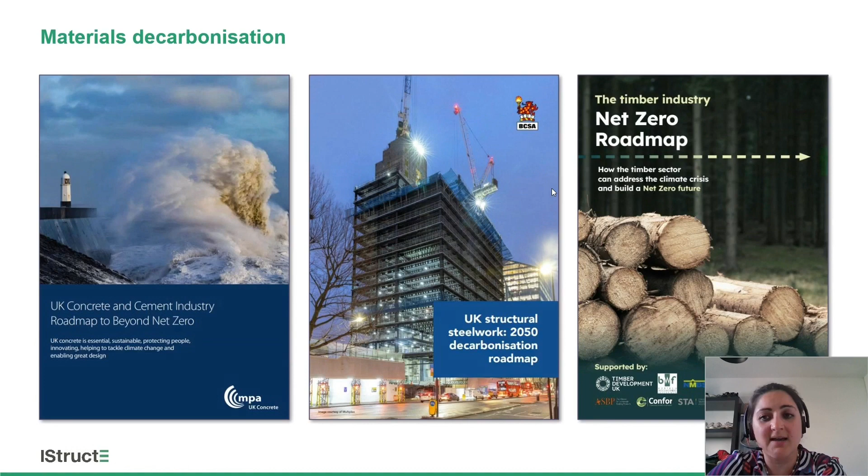The supply chain expectations: we're going to look at three of the key structural materials that we use - concrete and cement with the roadmap produced by the MPA, the structural steelwork decarbonisation roadmap produced by the BCSA, and also the net zero roadmap produced by TDUK, which was released I think in January this year.

Starting with concrete and exactly what's happening there. We've only included the emissions associated with production of concrete here, so that's why, if you're familiar with the roadmap, you might think a couple of them are missing. We've got indirect emissions from decarbonised electricity.

This is really focusing on the fact that we are going to be decarbonising our grids. Also with transportation, we're not going to be producing or selling new combustion engine cars and vans from 2030, and 2040 for diesel trucks. So there are savings indicated there.

There's also a focus on low carbon cements and concretes, which I think many of you might be more aware of because of all the industry press around these very interesting developments in that area. Then also in green we've got fuel switching.

So this is moving away from fossil fuels, but also focusing on things like hydrogen production there. And then we also have a very large percentage dedicated to carbon capture, usage and storage, so CCUS, which I know many of you on the call may be aware of.

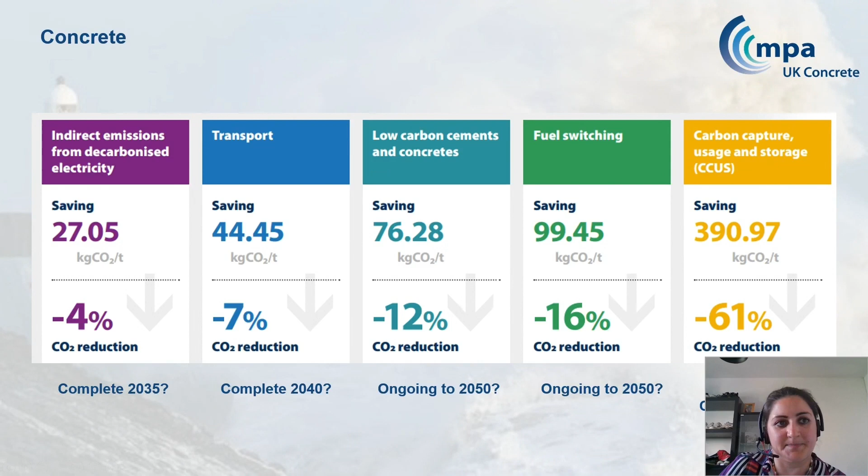Moving on to steel. Again, savings that are within the BCSA document associated with design efficiencies etc. have been removed - we're just keeping it to emissions associated with production. So therefore we should renormalize these CO2 reduction numbers associated with that.

The first and largest one is emissions reductions based on direct steel making. So this is everything from focusing on hydrogen production to changing fuel sources, those kinds of things. And again, with hydrogen, as with carbon capture and storage, it really relies on the fact that we're going to have to invest heavily and upscale hydrogen if we're going to be confident that it will provide us with the CO2 reductions that we need.

Another point, again with steel as with concrete, is reliance on the decarbonisation of our energy grid. And if we're switching to more electric-led production processes, then we'll need to really up that electricity and up our renewables.

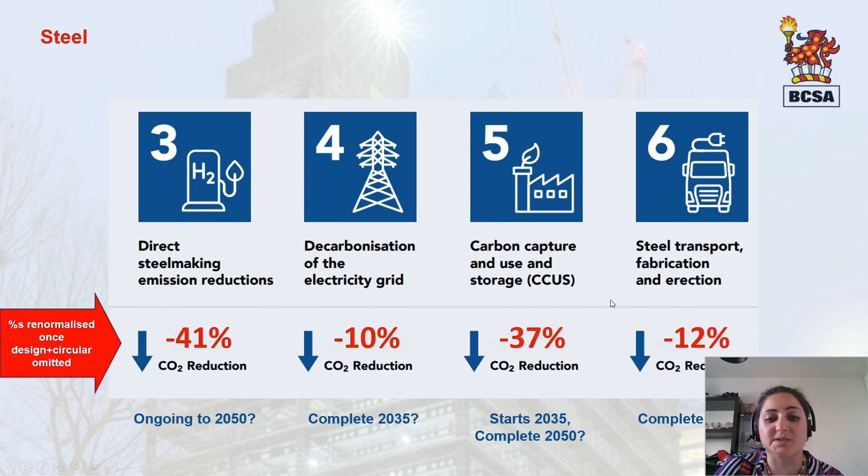Again, as with concrete, there's an emphasis on carbon capture and storage. And then there are reductions due to steel transportation, fabrication and erection as well - so this is focusing on hybrid vehicles, machinery, as well as electric as well. Again, assumed dates as to when this will be completed.

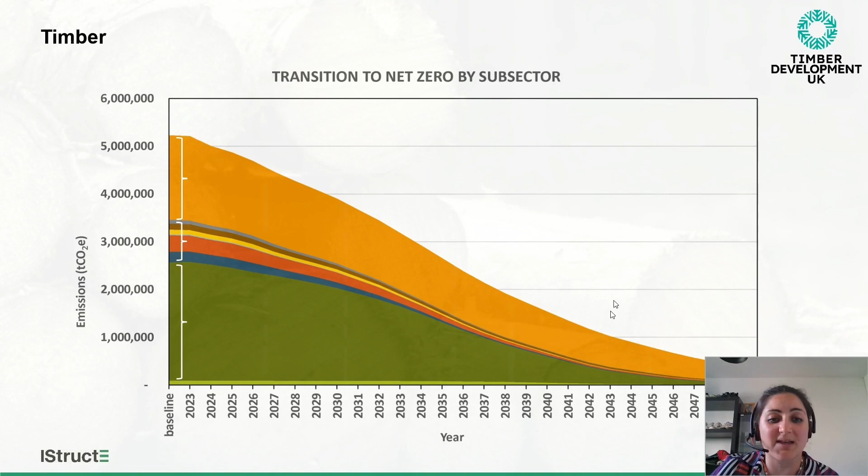Then finally to timber - even though it's actually quite a small percentage still of our construction and our emissions, it's always good to talk about it. Within the TDUK document, there is a graph here which has projected reductions year on year according to baseline. A lot of carbon emissions are actually associated with transportation for timber.

One of the reasons for this is that a lot of forestry processes, we as the UK don't necessarily have control over in other countries. So if other countries aren't using low carbon sources for their forestry, this was considered outside the scope of this particular transition. However, there is a breakdown in the document for territorial, UK-focused carbon emissions as of now.

There's a lot of moving around for timber from forests to sawmills, etc. A lot of these emissions are to do with fuel and transportation, but there's also quite a lot of emissions associated with kiln drying of timber. So focusing on making those processes more efficient, and also heat recovery and things as well.

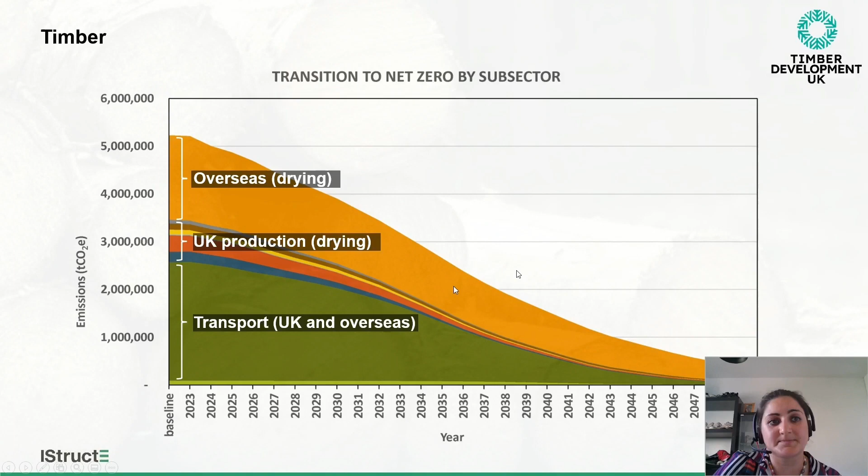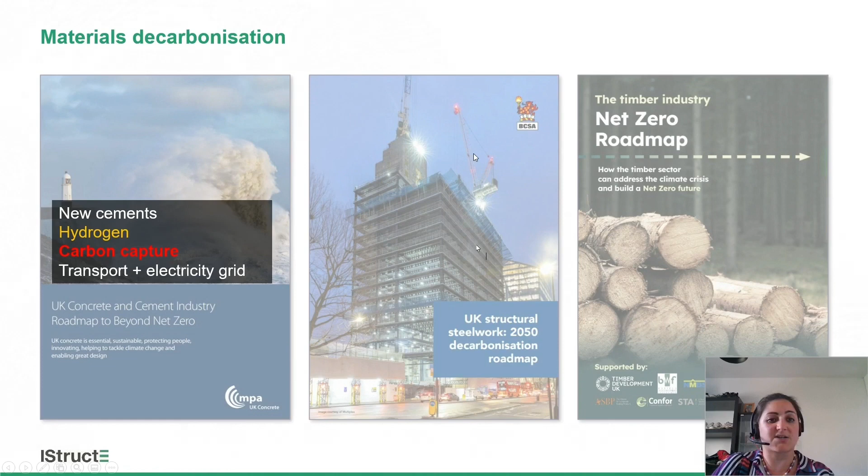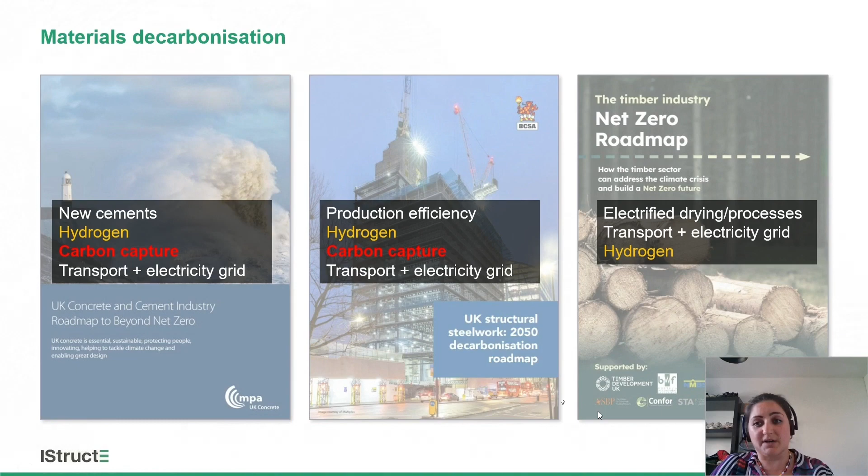In summary, for concrete, as part of its roadmap, there's an emphasis on new cements, use of hydrogen, carbon capture, and also improvements with transportation and electricity grids. For steel, a similar picture - more production efficiency, hydrogen, carbon capture, transport, and electrical grids. And for timber, there's a bit of a focus on hydrogen, but also electrified drying processes, transport, and electricity grids.

One of the key recommendations by the UK GBC is that if decarbonisation investments such as CCS are not planned for and delivered as projected, then other areas of the built environment will be required to deliver these reductions. So I just wanted to state that.

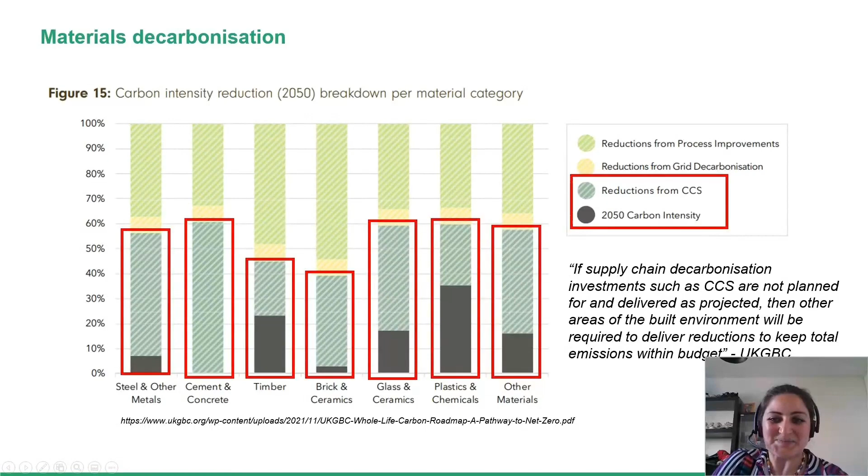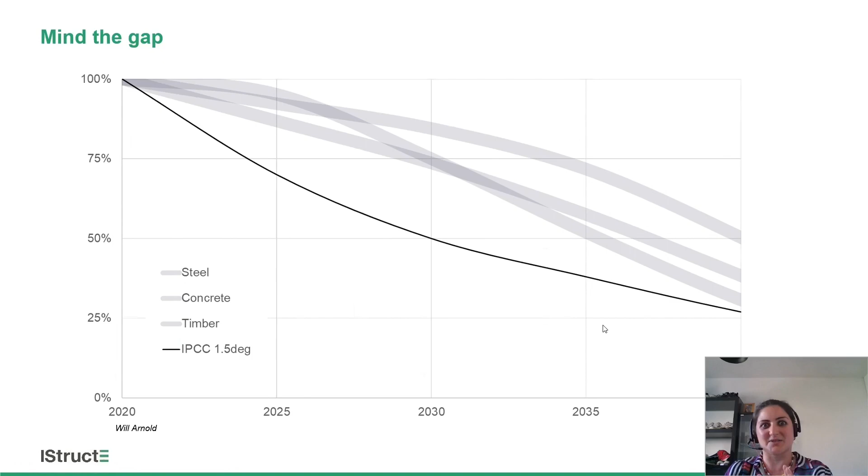By taking those kind of projected and assumed reductions and putting them alongside the IPCC line, which Will Arnold did a couple of months ago, you can see there's a bit of a discrepancy between those lines. It doesn't really matter which material you're considering - there's a discrepancy. So what we need to do is close the gap.

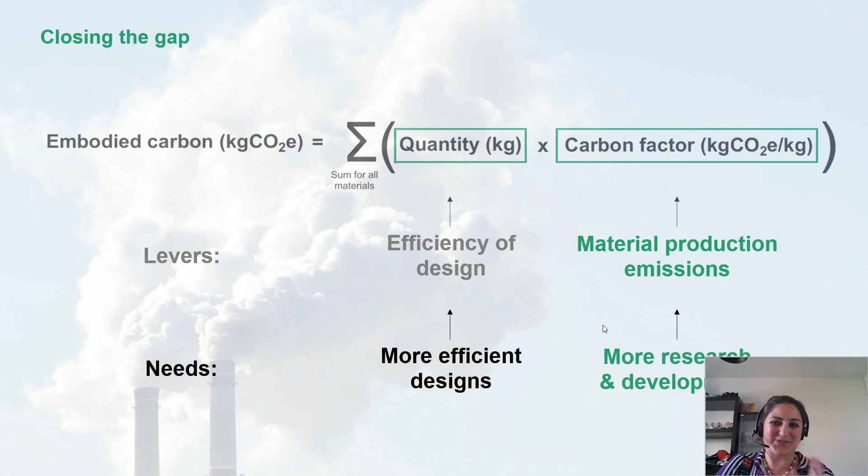We can close the gap in two different ways: we can make our designs more efficient, and we can also target the material production emissions. So how do we make our designs more efficient? We design more efficiently, and to reduce the material production emissions, we look into research and development.

With R&D, we can bring the lines closer to now, and with more efficient design, we can reduce the amount of carbon emissions we're emitting in the first place, to hopefully keep it either at the IPCC 1.5 degree line or below.

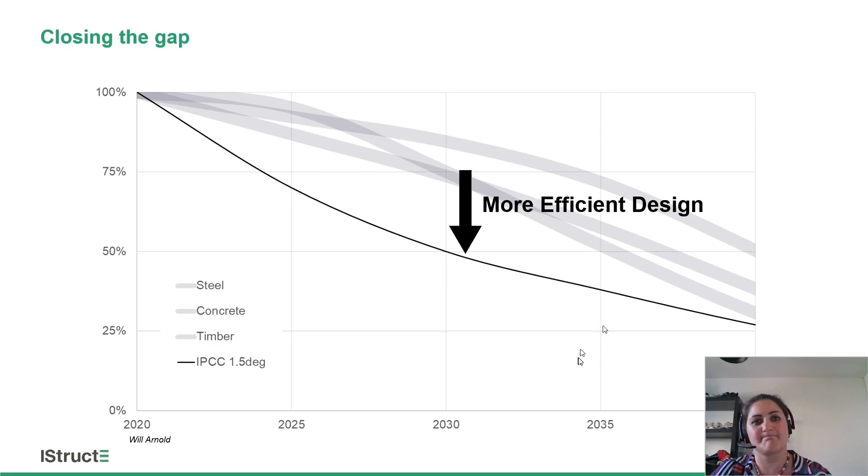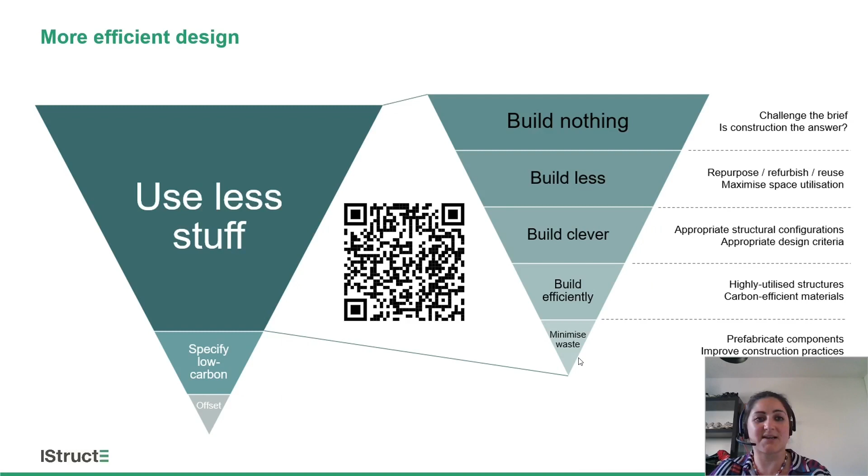I'm not going to focus on more efficient design because it's been covered before, but it's always good to talk about the double triangle graph here. Please scan the QR code - I did redo it and check it, and it should take you to a longer document that talks more about the key tenet of using less stuff as structural engineers. So please, please, please read that if it's new to you.

So typically, newer technologies are more difficult to get implemented in our projects, and older, more tried and tested ways are typically easier to get implemented.

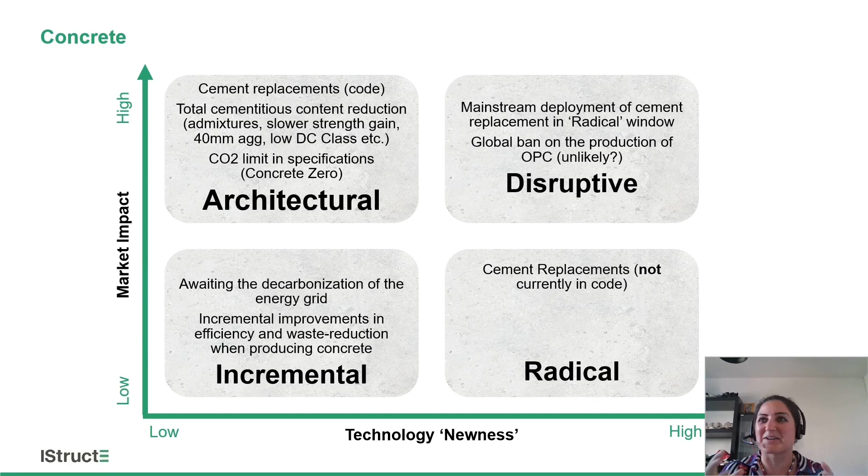In terms of radical innovations, I saw these as cement replacements that are not currently in code, and I've got an extra slide on that next. And then with disruptive, it's mainstream deployment of cement replacements within the radical window, or something completely disruptive, such as a global ban on the production of OPC. It's something that seems so out there that I think it should probably make quite a few people wince. It's that kind of innovation that fits into that window there.

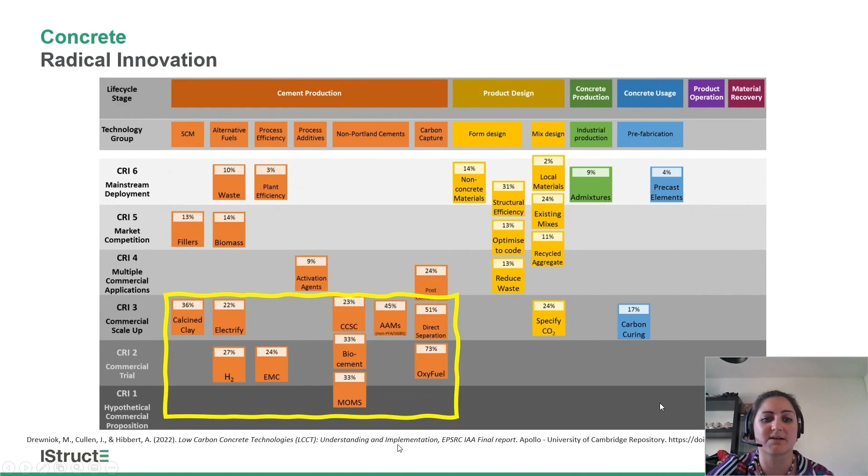Moving on to steel. Again, with the incremental innovation, we've got the decarbonisation of our grid, fuel replacements, moving to more renewables, and incremental improvements in efficiencies, heat recovery, etc. In terms of the architectural innovations, it's things like signing up to Steel Zero commitments.

It's things like putting a preference on open sections and S460 plus sort of steel strengths where possible. This is because with open sections, the way that they're produced, you're more likely to get a lower carbon steel than a plate that you can get in the UK, and also hollow sections.

In terms of radical innovations, some of you may have heard of direct reduced iron, molten oxide electrolysis, closed loop blast furnace. So these are new ways of producing steelwork, which can have much lower embodied carbon than usual, so the usual sort of basic oxygen furnace route.

And then disruptive might be something like, we have a 20 to 30% reused steelwork target for all new buildings. So that kind of thing, and emphasizing reused steelwork, because as we know, reused steelwork can typically have a much lower embodied carbon than new.

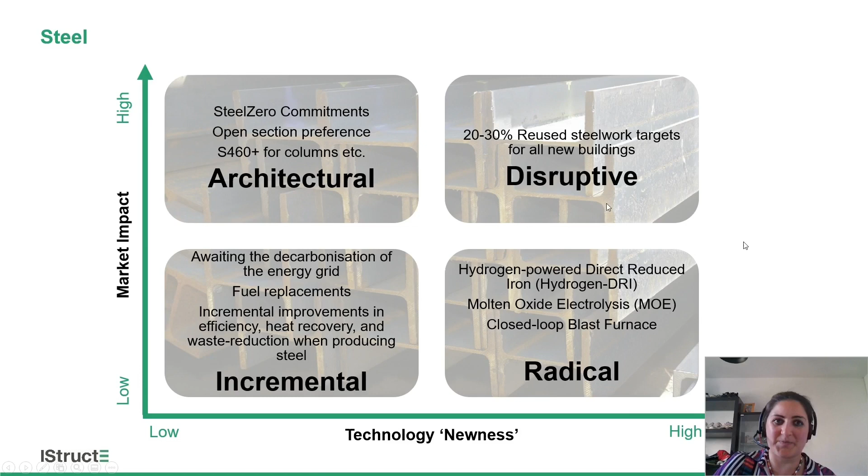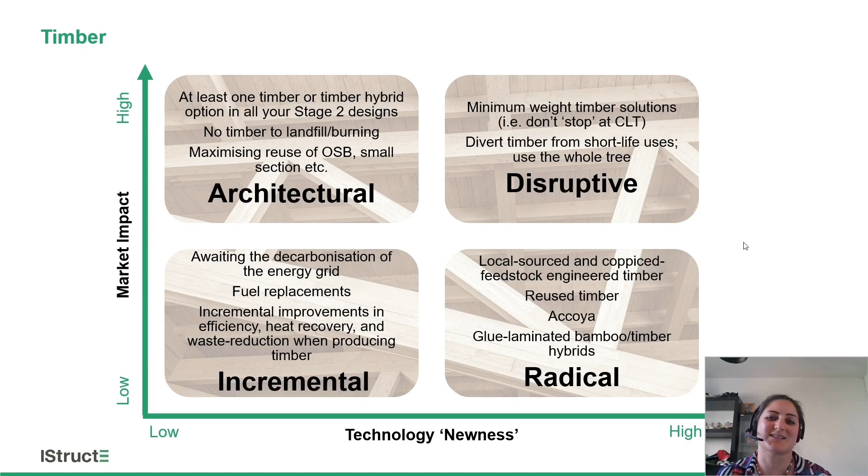Right. So in summary, need to close the gap. More efficient design, more R&D, but what can we do now? First one is use less stuff. Second one, I would say to you, is to have at least one timber or timber hybrid option in all of your stage 2 designs.

Sign up for Concrete Zero. There are certain targets that you should meet for that in terms of embodied carbon requirements for your concrete specifications. Sign up for Steel Zero. That really sort of emphasizes the market demand for low carbon steelwork.

Don't overspecify GGBS and scrap content. Apologies, I didn't actually go much more into that, but there is guidance on the IStructE websites following that, and I've got a QR code at the end.

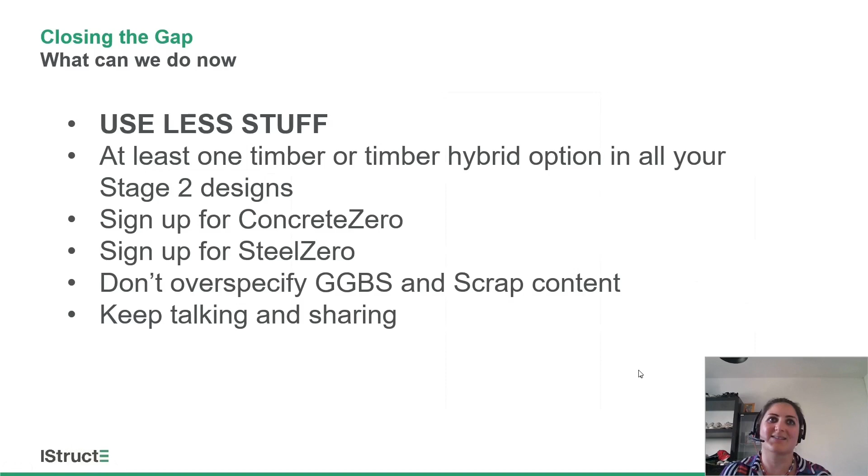And keep talking and sharing as well. The more we talk about it, the more we share. The more we share where we've made a mistake or we've shared where something didn't quite work out, the sooner we can work together and save the planet.